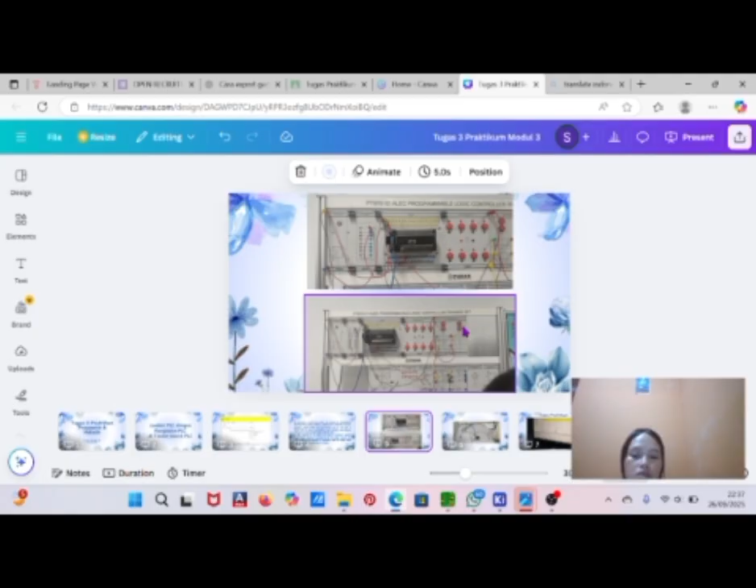The pneumatic cylinder acts as the final actuator. Its movement, extend or retract, can be monitored, and its position may be fed back using limit switches.

Pneumatic part explanation. The solenoid valve is a 5/2 single solenoid valve connected to a double-acting cylinder. When the solenoid is off, the cylinder is in its default state, retracted. When the solenoid is on, after the 5 seconds delay from the ladder logic, compressed air flows into the cylinder, causing it to extend forward. The limit switch detects the end position of the cylinder stroke.

Sequence of operation step by step. The operator presses the on button on the input simulator. The PLC detects input W0.00 and starts the 5 seconds timer. After 5 seconds, output coil 100.07 is energized. The output drives the solenoid valve, sending compressed air into the pneumatic cylinder.

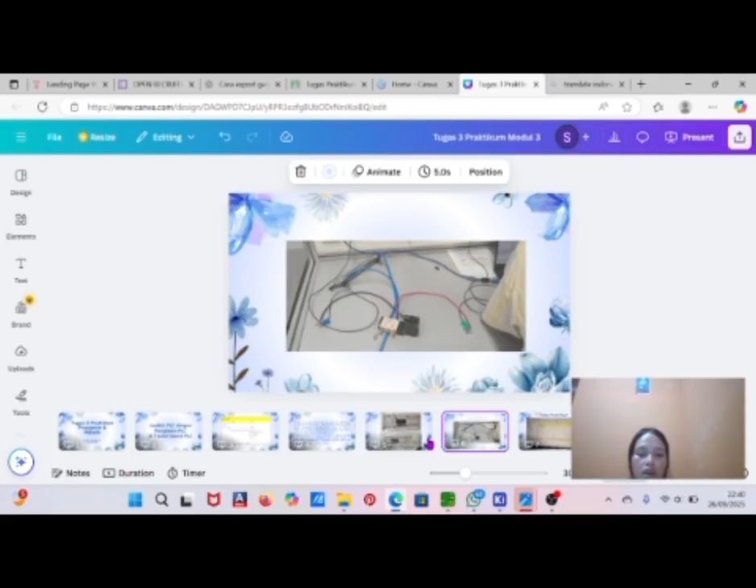The timer function allows precise delay control before actuating the cylinder, which is commonly applied in sequential machine operations such as packing, stamping, or automatic loading systems.